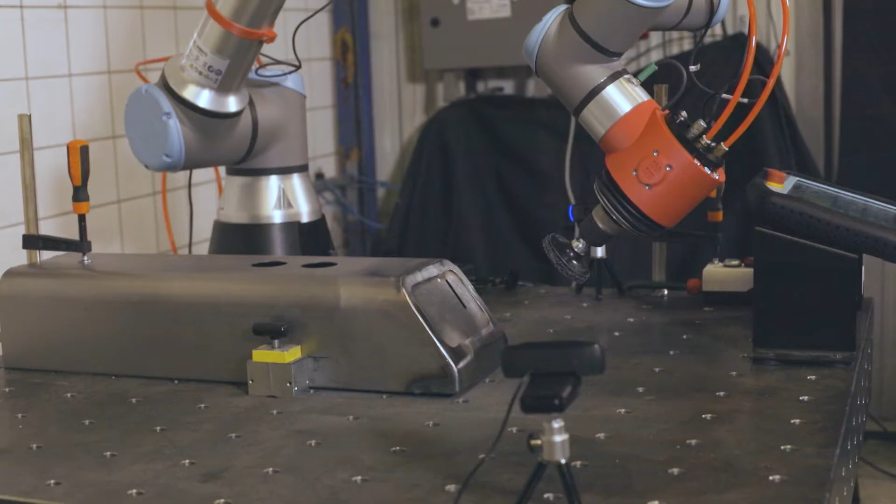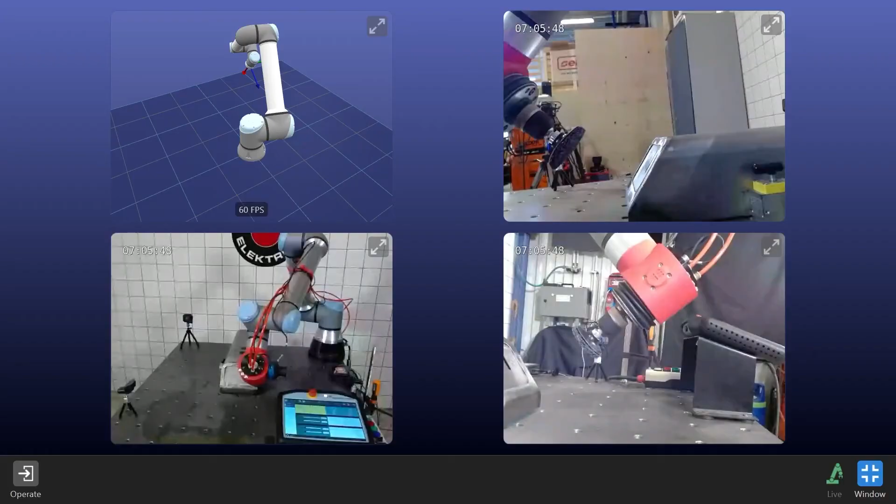So Fredrik, I've connected a robot in my workshop. I have loads of cameras set up showing everything live, but we're also recording our screens so we can get this cut together. There's nothing super interesting about the robot itself right now. There's a tool in the hand of it, but you won't be able to use it because we're using some of the pneumatics for another system. But I figured let's just show people what's possible to do with Olis Connect, because this morning I've picked up and installed the Olis Connect software and everything related to it. I'll show everyone in a second what that entails.

And I figured if you just share your screen and connect to my robot via Tailscale VPN. I'm actually using the browser plugin with OBS to record right now because it's more performant, so I was going to skip sharing if that's okay with you. Yeah, that's fine. Will you grab the video from that recording? You have an Olis Connect view pulled up as well, right, so you can see what's going on there. I can do that, let's do that.

Let's see, I mean I can share my screen, I just don't think it would be very good footage regardless. Yeah no that's fine, I got it here. I have my robot now, but I'll not go into the operator view because you'll be doing that. Correct, cool, so I'm going to head over to the robot. Okay, I'll still have you in my ear so you'll hear everything I'm saying. I'll hear everything you're saying, and I'm going to be talking to the folks and having you do stuff while the Olis Connect window is up on my screen.

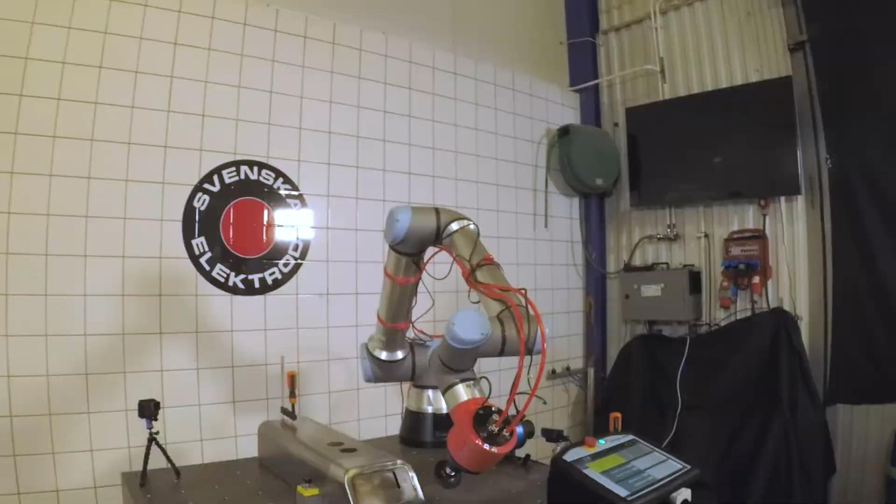So I'm bringing this GoPro with me into the workshop, so you won't see me anymore, but now I'm in the workshop. How far away is your laptop from the robot? It's about 20 meters or so.

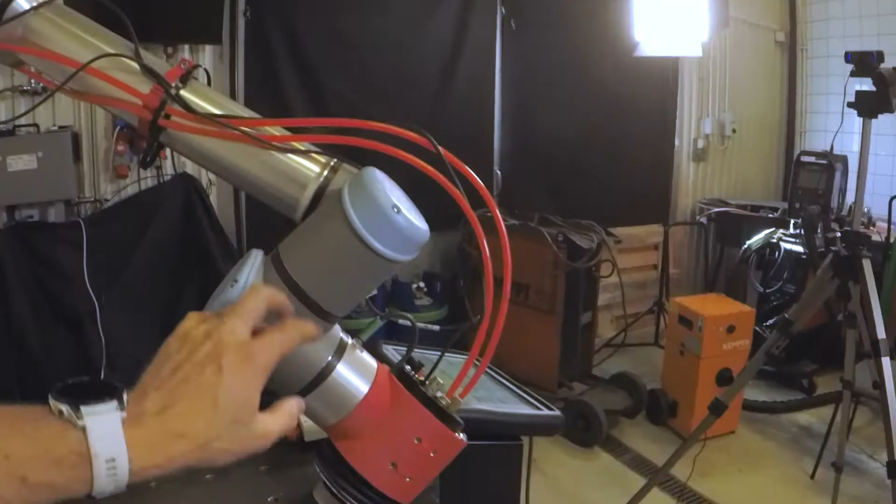So guys, what we're seeing right now is just a robot setup. We used this yesterday - if you've seen the videos, we've done some grinding applications with this setup. It's a UR10E with an MFT spindle from Schunk and a grinding tool from 3M.

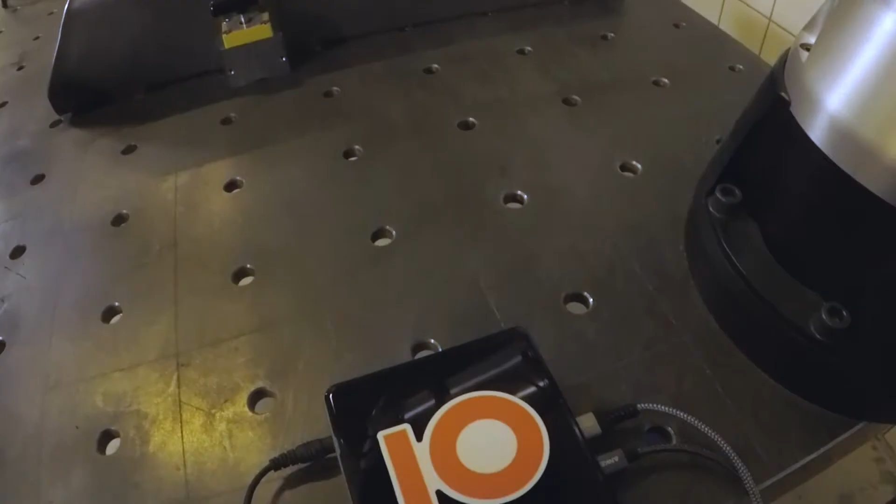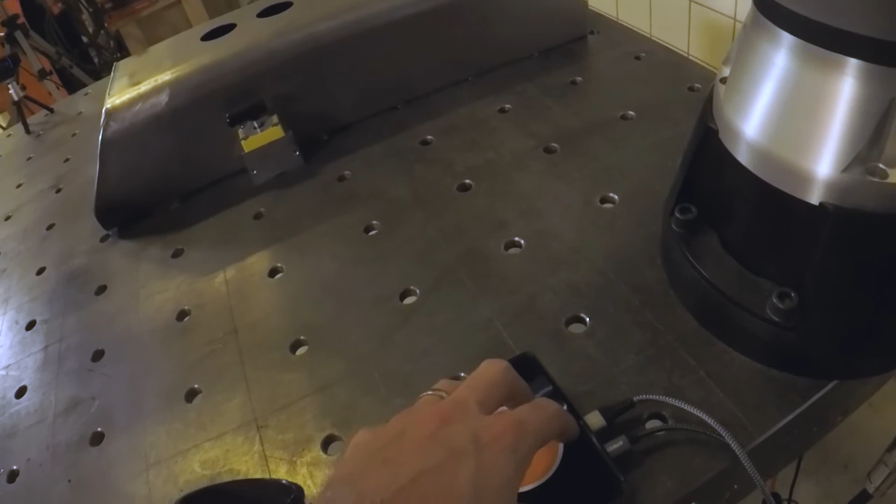And what you see in addition to what you've seen before are a couple of other cameras. You have one webcam over there, one webcam over there, and one sitting up here. And all of this is connected to this little guy - this is the IPC from Olis Robotics. Well, the PC itself isn't from Olis Robotics, but their software, Olis Connect, is now hooked up to this. And sorry for the wiring, it's a bit messy in the workshop, but this one is hooked up to the network where the robot is connected as well.

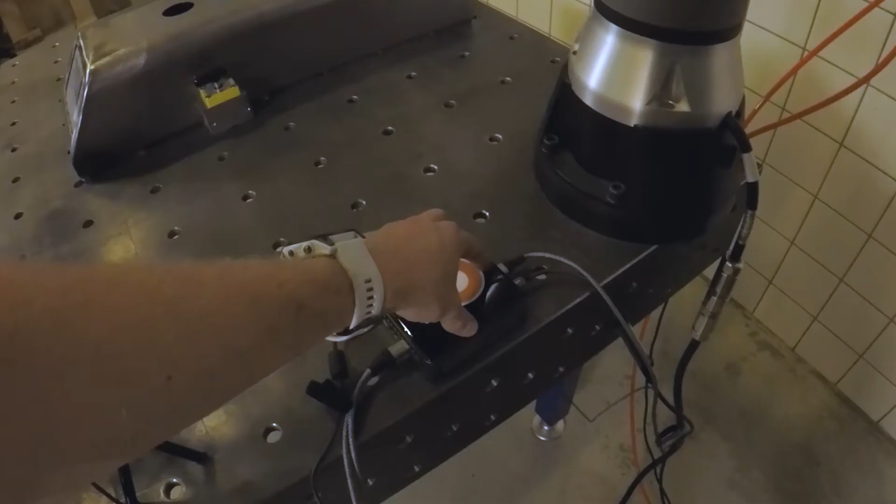So the control cabinet of the UR is connected through Ethernet to the Olis Connect, together with a lot of other stuff. Then this guy is right now connected through Wi-Fi into the internet. Fredrik, I guess you are now logged into my robot, right? Correct, so I am 5,000 miles away in Seattle, and I've got your robot pulled up here on my other screen. That's pretty cool.

Just feel free to move it. Oh sorry - so what we've done now, and what you see on the screen, is that you can see this camera, which is like an overhead view of everything. And then we have a view down here, which is right now looking at the tool.

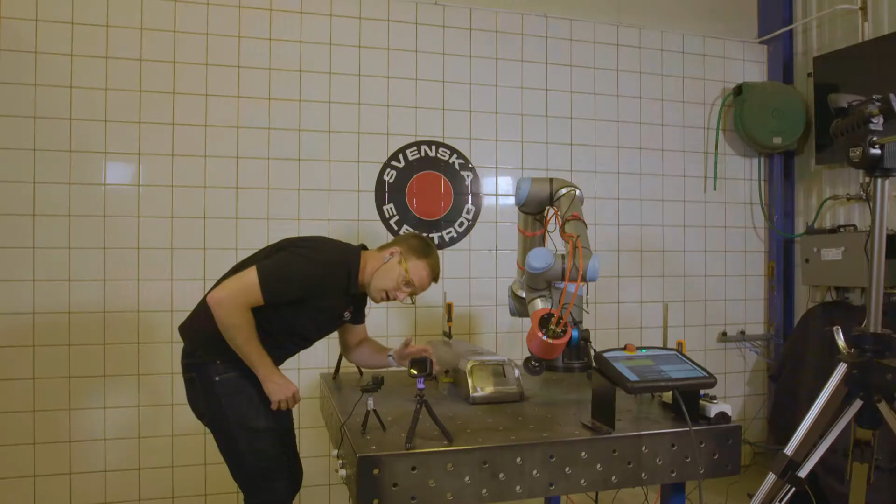We might as well put this one on the robot arm, but I haven't had time to do a bracket for that yet. So this one is now looking at this one, and then we have this one over here, looking at the view from this side. This gives us 3 different angles, which means we can remotely control the robot and have control of everything, not bumping into stuff, etc.

And that's one of the beauties of using the Olis Connect, right, Fredrik? Yeah, exactly. And I think the flexibility in mounting these cameras just kind of depends on the application, how you want to do that. If you want to use the tripod that it comes with, that's great, or you could put up 80/20 and mount them on that. It just kind of depends.

I was just kind of curious, what would you like? How would you mount this if you had a little bit more time? I know you just kind of set it up today. Yeah, so I definitely have one mounted on the actual, well, close to the TCP, but also linked to the 6th wrist of the robot.

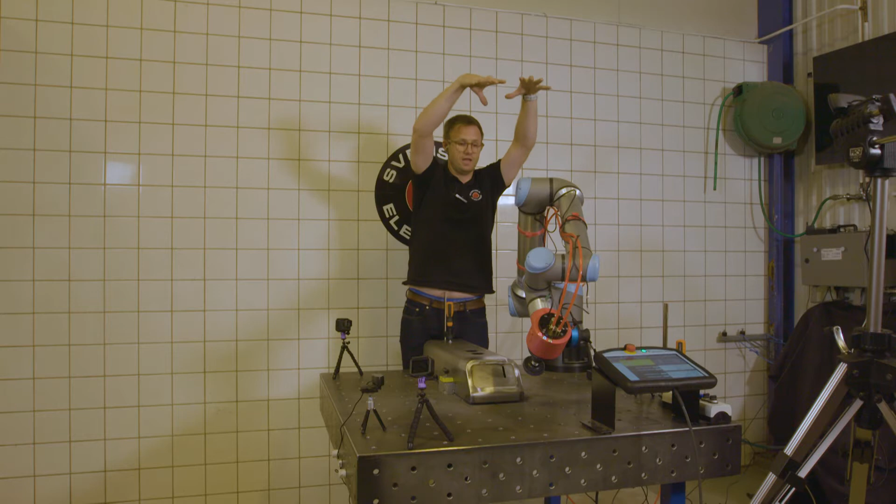So that I would have control of all my movements if I want to do nitty-gritty stuff over remote connection. The other one is definitely something like this. I might actually put one right above the whole application, somewhere up here, just to get a full overview of everything happening. And then I would have a peripheral view somewhere along the side to see something that I don't see from the angle.

So for example, in this case where I want to be really close to a surface, I would have something from a peripheral view like this and really just see exactly how I'm being close up with the part itself.

And just a quick question, how long did it actually take you to do the setup of this thing? I mean, basically depending on your setup, right? So if everything is very standard, you haven't done anything, it's basically a robot that has no UR caps, everything is just set up the way it is straight out of the box, then it simply takes like 5 minutes. Because it's plugging in, well, the longest time is actually just unwrapping your very, very professionally packed box.

So everything was very protected. It was shipped from the US, right? So we don't want anything to break in the delivery, and it's all very, very well packed. So that's actually one of the most time-consuming parts in the installation.

And just a note on that is that everything you see now, all the cables, the cameras, everything that comprises the Olis Connect, that's coming in the box, in the package. So you don't need to add any stuff. You don't need to go to your local department store and get any other cables, etc. Everything is there, so it's very professional in that way.

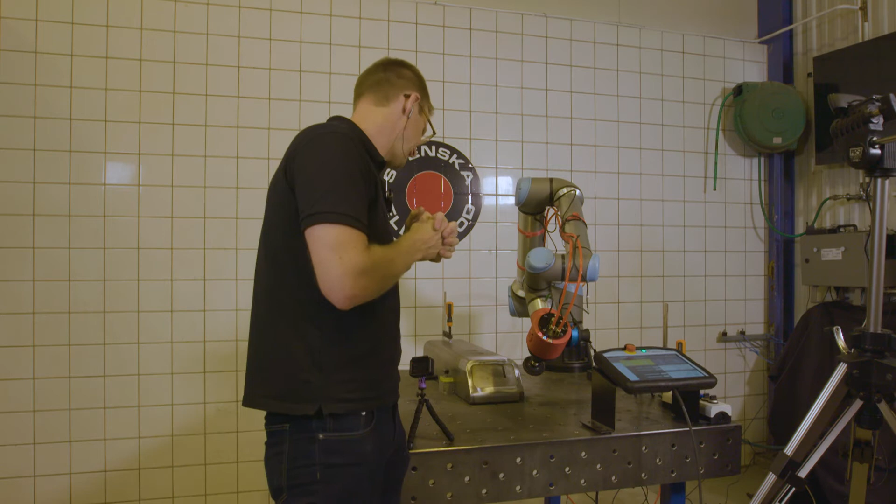So show me when you move my robot. I want to see that firsthand. I mean, my guys have been standing here when I'm doing it, but it's kind of cool to see someone else do it from 5,000 miles away.

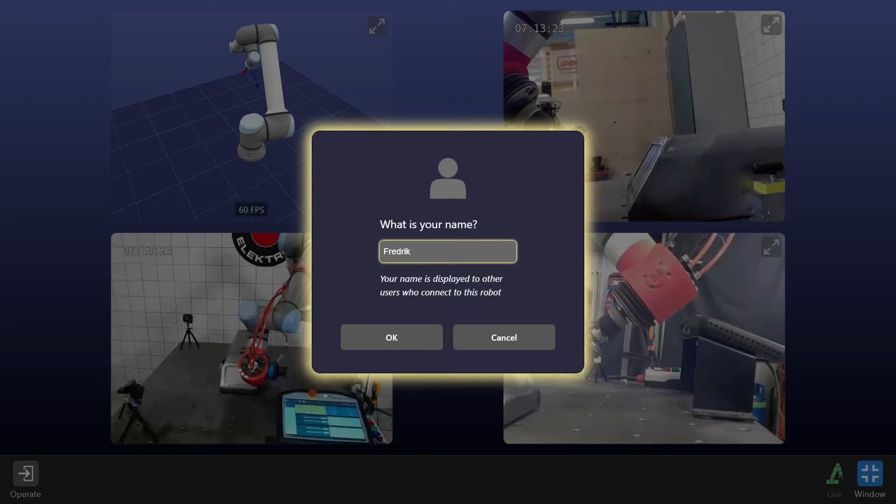Yeah, so what I'm going to do here is go in and click Operate in the Olis Connect view. It's going to ask me for my name first because it's the first time I use this robot, so I'm putting in Fredrik, and then adding from Seattle at the end, so you'll be able to see that probably on your screen. Now I open up here, I see a couple of cool digital IOs.

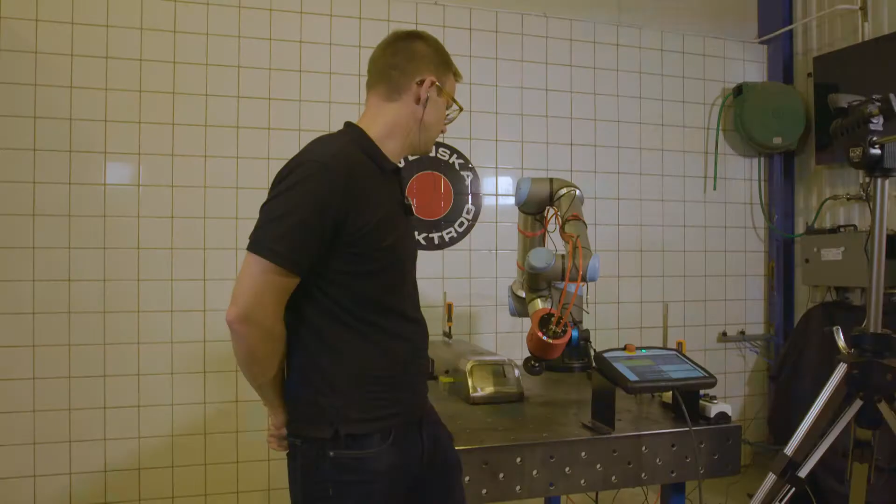I see that you're already in manual teleoperation mode, so I can just click here and drive the robot a little bit, which is pretty cool. And I notice, okay, so you have the TCP there, and it looks like the tool is basically oriented along the Z-axis. So if I move the blue button here, that corresponds to the Z-axis. We can try that, and you can see how the tool moves a little bit.

Nice. Yeah, and I can move it a little bit back there. So it's like I'm 5,000 miles away, but honestly there's not really that much in terms of perceived latency here. It seems like we have a good bandwidth here.

We have a good connection, honestly, sometimes it's just a matter of making sure you're on a good Wi-Fi network or a good wired network, and then you have this. So I can try to move a little bit. Let's see, so green there is left and right.

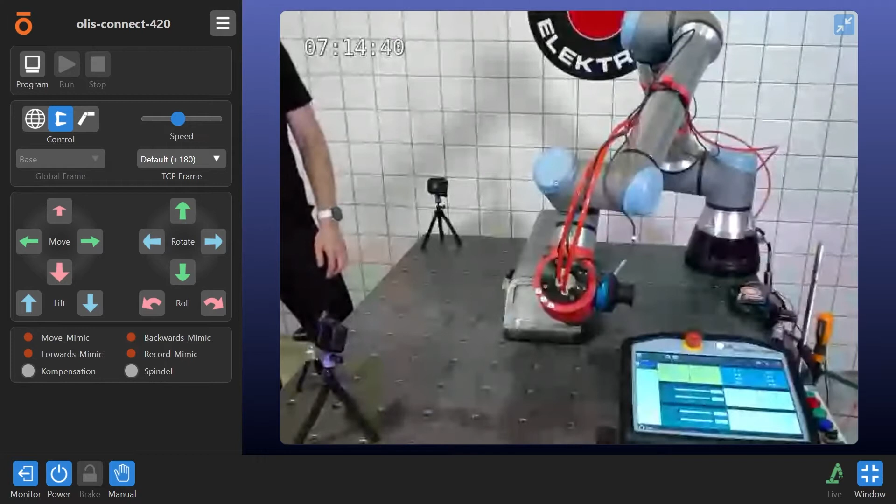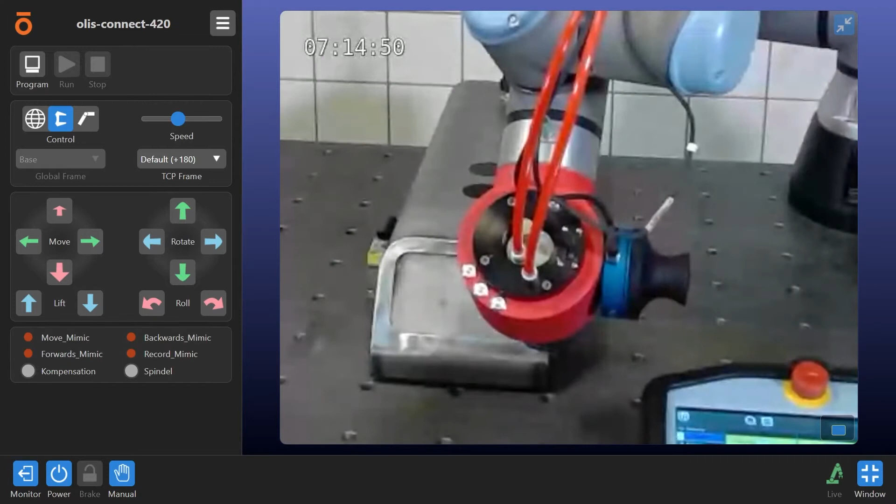Yeah, exactly, right. Oh, and that one corresponds actually to this camera. So I reversed everything, I've reversed the setup 180 degrees to make everything correspond, and that's because of the mounting of everything. So it should work, the only thing that's not going to correspond is the red arrows, that's going to be opposite.

I see, so let me try that. So there, yeah, oh okay. Yeah, so that will be up and down there relative.

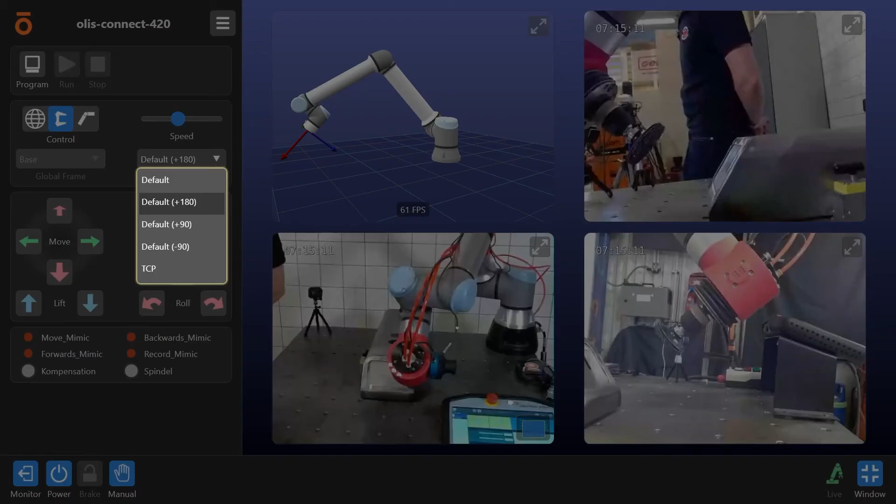Yeah, exactly. And I think you could even, if you wanted to, set up a custom TCP on the robot that was perfect, because it will automatically pull all the TCPs from the UR. So if you set up one that was sort of non-standard, even maybe at the end effector of that tool, at that 3M piece, we could actually drive with that as well.

So, okay, this is super cool. This is a really nice setup. I love this advanced set of tooling you got here.

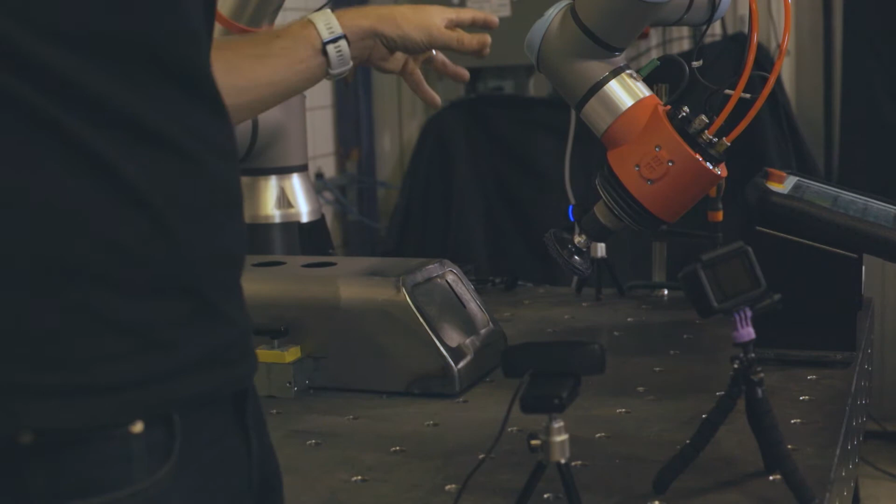Yeah, it's cool, because the reason why we think Olis Connect will complement all our integrations so well is because you have this kind of setup. You set it up with a customer and everything is fine, everyone's super happy, they're starting to use it straight out the bat, and they're just super happy.

But then it goes a weekend, they come back on Monday, and it doesn't work. And it's, why is it banging into everything? Why is this not working? Why is this not working?

Well, if the customer is not 5,000 miles away, but literally across the other side of Sweden, which would take me 5 hours to drive, I could just log into their robot, see what's happening, and tell them and guide them through it. I wouldn't necessarily need to go into the Pendant to help them do stuff, but I could actually just be online like we are now and help them do stuff remotely, because I'm seeing what the robot is doing, I'm seeing what they're doing, and then just guiding them, holding their hand, so to speak.

So that's one of the benefits that I really see with Olis Connect, no matter the application, whether it's a pick and place application, a grinding application, a welding application, or whatever.

Do you think this is going to save you time with your existing customers, or is it going to enable you to actually go farther and support customers that are farther away from where you guys are? So, both. I mean, Sweden is a long country, right?

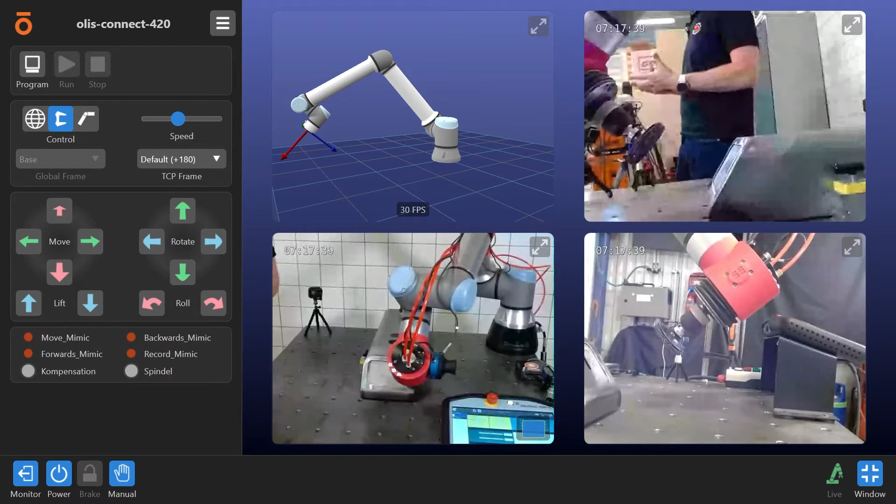So it's about 2,500 kilometers if you drive across the whole country. So to be able to support customers up in Luleå on a daily or weekly basis, this will enable us to do that, giving them good on-ground support up there without any staff on premises, which wouldn't be possible otherwise. But with this kind of setup, that would definitely work.

But then, we have existing installations where we have daily calls because the customer itself doesn't feel that comfortable, or they're changing staff a lot, which means that having something like this on site, when they call and we can talk about what's actually happening as it is happening, that would be just super beneficial.

Oh, it sounds super cool. So I'm going to move over to my computer again, and I'm going to see what you're doing when you go into, I'm thinking, show me the Pendant View in the streaming of the Pendant. Cool.

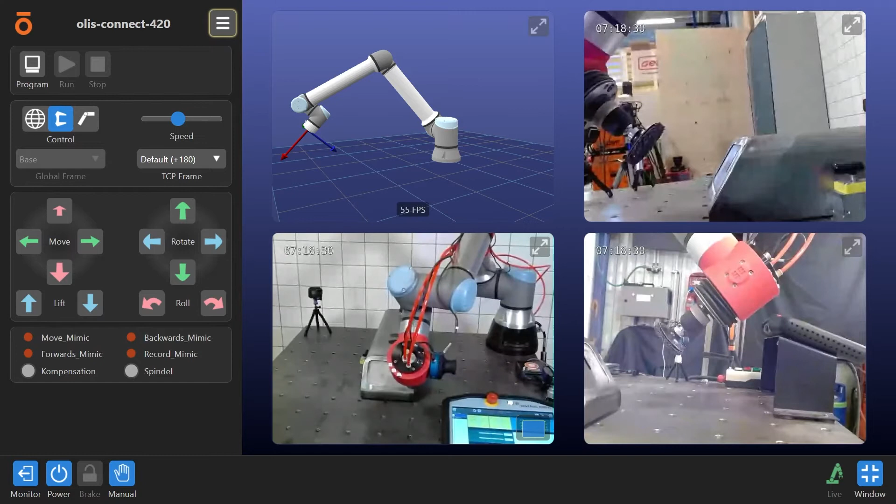So what I do then is I pull up the Pendant View here. I click on that hamburger menu and then Pendant, and then it says failed to connect. Do you have a password on the, the standard password? Yeah, the standard password, exactly. So let me put the standard password in and go back, and you can cut that.

That's fine, I like these kinds of things. It's supposed to be organic.

So can I see what you're doing now when you go into the pendant? I can just share a window here so you can see a little bit what's going on. Okay, I'll move into the Google Meets tab then.

Okay, so this is cool because this is my pendant now. We can see up on the right-hand screen of that pendant that it's in remote mode, and that's what enabled you to actually do the remote controlling.

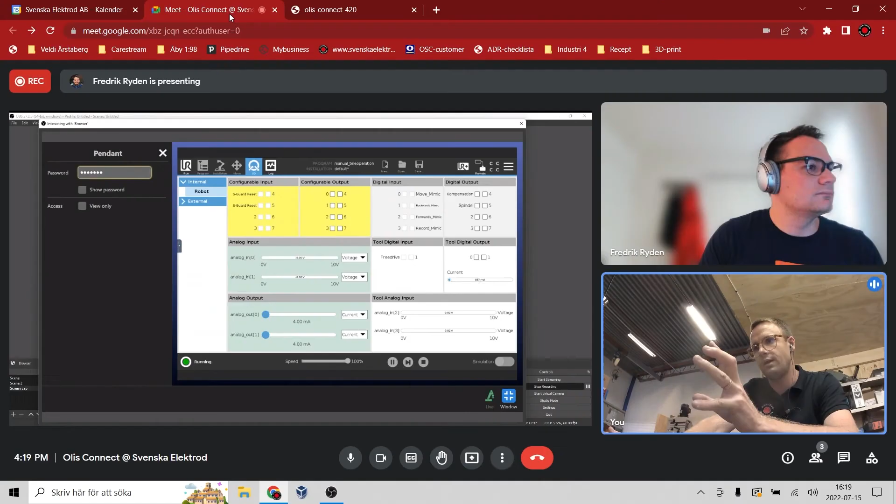Right, but right now are you in view-only mode in the pendant, or can you actually do stuff? Oh, I have full control here. We put the password in and changed it to full control. So we actually have full control on the pendant.

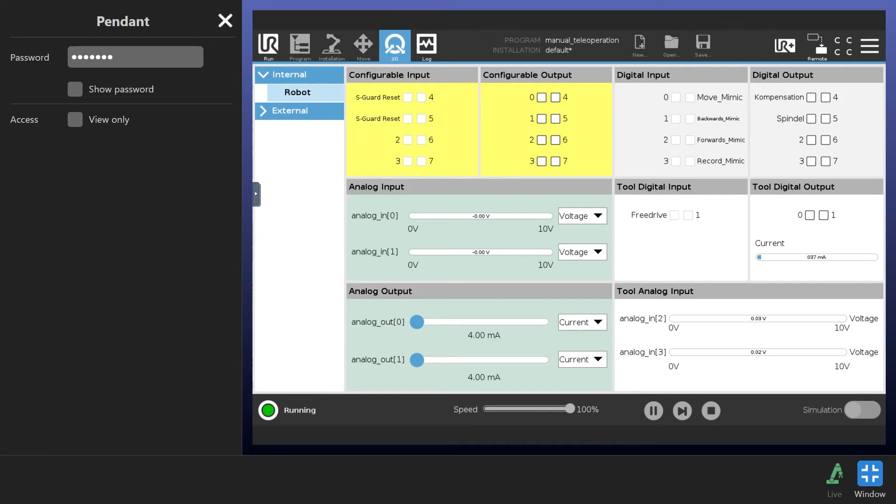Now this robot is actually in remote mode, so I can't actually do anything at this point. What you can do, if you deem it a safe thing to do, is take it out of remote mode. This is why we put an extra safety barrier on it, because you might not want people to be able to go into the pendant at all, even to take it out of remote mode. So that's why we have the password.

But let's say I do that. I can switch over to local control because I have your explicit permission, and yes, you do. Well, I wouldn't go that far, but you do have my permission. It's not that I know what I'm doing, it's just I want to see it happen.

Right, let's work through it. So you can see now there's an error at the bottom saying the UR is not in remote mode. So Olis Connect is very aware of this, and basically at this point it won't let you restart any programs. It won't let you manually control or anything, so none of the stuff that would require remote mode.

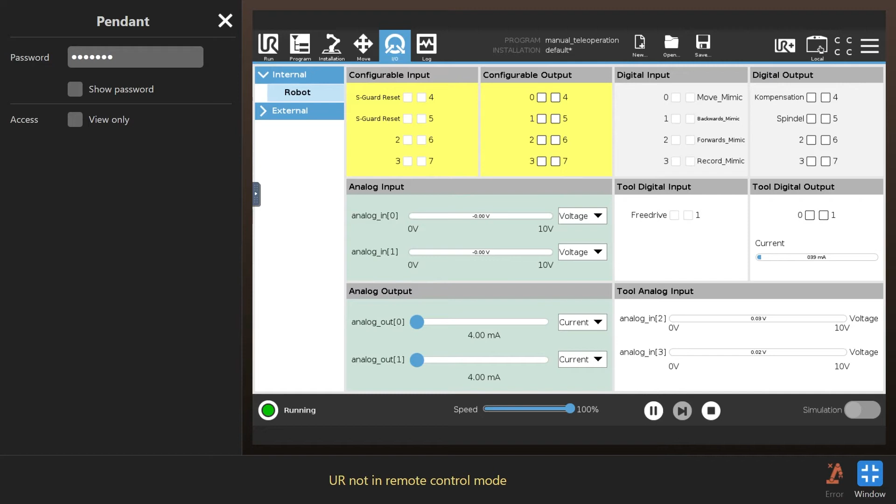Exactly, you can now help someone do the programming, but you cannot actually start anything without going into remote mode again. Correct. Yeah, so first, one thing we can do is get to see your UR caps.

We can see the Olis Teleop UR cap here, which is useful to see all the different settings and network settings, and you can see that now it's controlled by me, it's actually listed here, so that's kind of nice as well. You can go through and see all the different setups, or we can see what program is loaded. Right now it was just the main manual Teleop program that was being loaded.

And this is loaded, you don't need to create this, right? As soon as I put it in remote operation and you log in, that's already created, right? Yeah, correct, so it gets created automatically. You set up your Olis Connect and it gives you access to all the programs, but it also puts this manual teleoperation program on there automatically, so you don't have to do anything.

Now if you want some custom teleoperation program, we actually have support to do that. So let's say, hey, I want every time a person goes into manual teleoperation, I want this light to be flashing - you could actually do that. You could change this and say, I'm going to set some IOs here to trigger that light and do all that stuff. And you can save that down and call it 'custom, my custom teleoperation program,' and then that can actually be used.

So that's another really cool feature we built in, because depending on what environment you're in, you might or might not want to customize that.

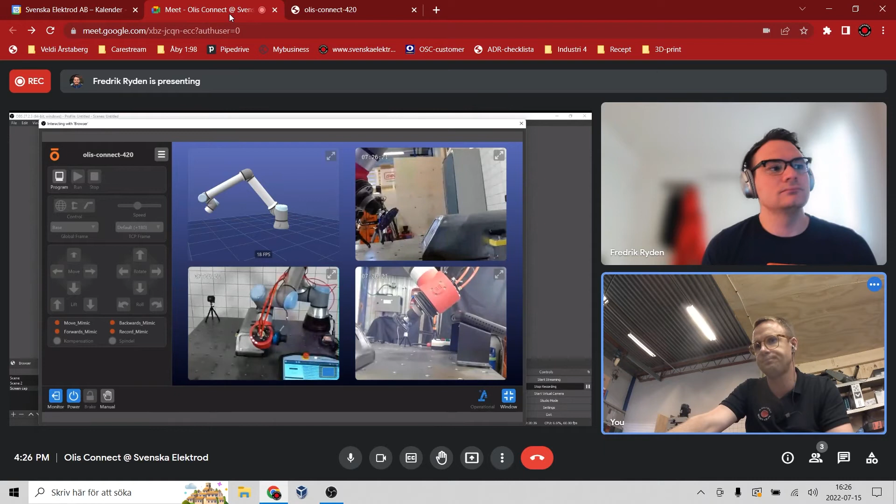Yeah, and one thing I actually wanted to show you was the alerts, which is kind of cool. I don't know if you've had any alerts. Yeah, you triggered a protective stop. So I can actually see these past alerts on the device as well. When you're remoting into a customer's site and they're saying, hey Karl, we've been having problems all night long, the robot stopped 8 times, what is going on? You can just go in and check those instances and see what actually happened. You can say, oh, I think we need to swap out that tool, or whatever it might be.

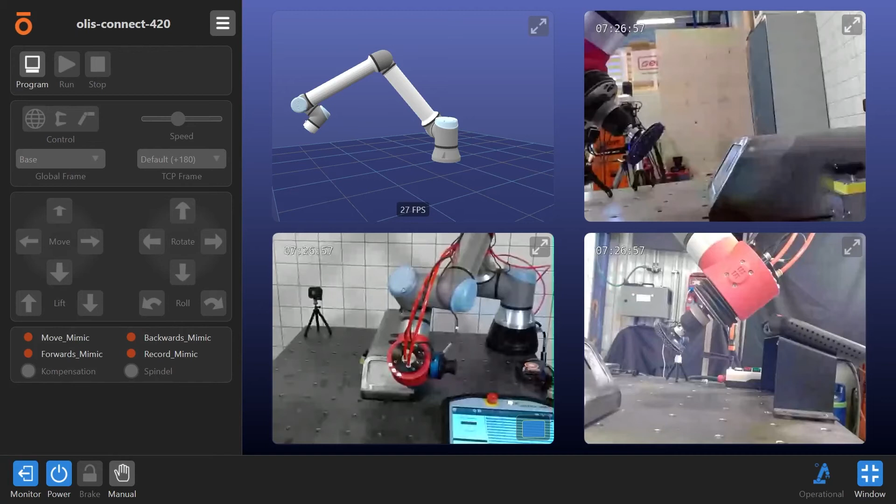And we can actually try to trigger an alert right now. So you have your email put in there, we can keep the emails going to you. Literally, if I just jog the robot and you hold your hand up, we can e-stop it, and that would send out an alert. You want to try that? Yeah, let's try that.

I'll put my hand next to it like so. Okay, I'll move it in that direction, I'll slow it down a little bit. It's fine. There we go.

There we go. Yeah, so now I got a protective stop notice on my screen, so I can see that this happened. And the same protective stop is happening over here, so I need to enable the robot here if I want to do anything. But that's one of the beauties here, I don't actually need to do that, we can do that from over here.

And the cool thing about this is that now once that's been triggered, it should send an email to me, right? Yeah, exactly. It takes about a minute or two for it to compress all the video, since it takes the last 30 seconds of video and emails that out. But it should arrive in the email shortly. In the meantime, I can go in and see what's going on here.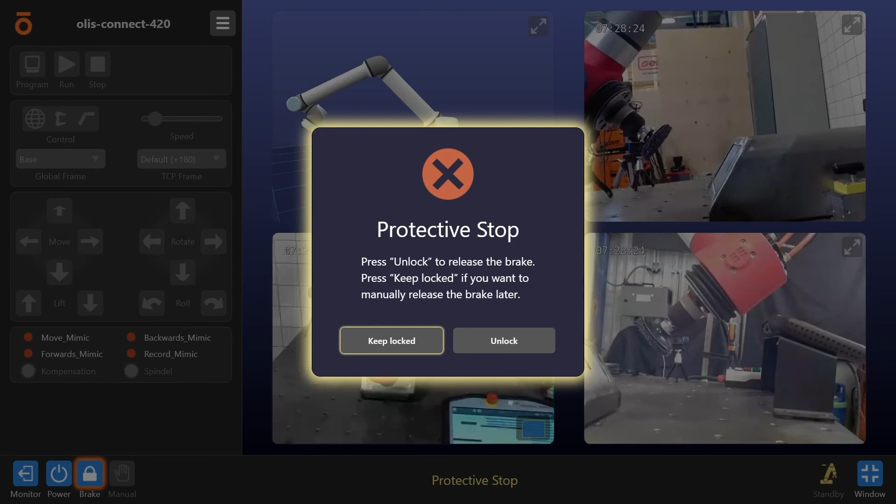So I can actually keep the robot locked if I'm not ready to unlock it, if this is an unfamiliar situation. I can look at all the cameras and say, okay, I know that no one is in this cell. And I can look at the camera and say, you know what, it looks fine to unlock it. So I can release the brakes.

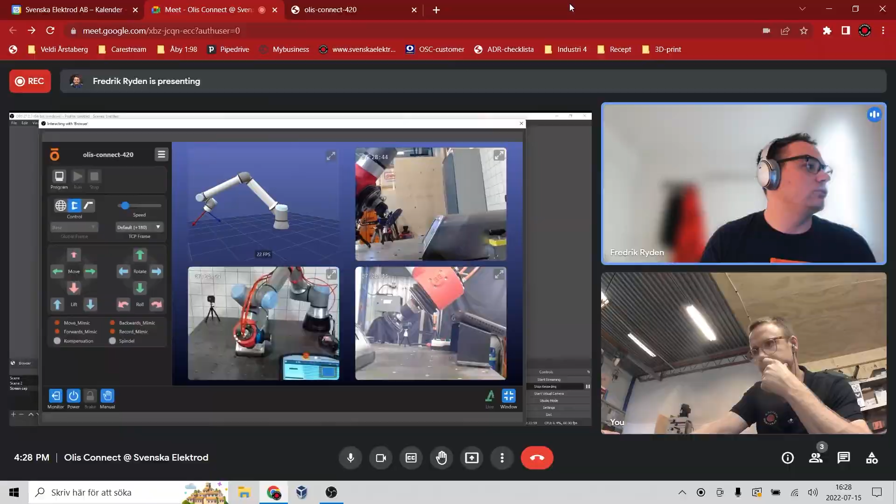And if I wanted to, I can actually go back into manual remote control mode, and now I can drive the robot again.

So you should check your email, and maybe you should share your screen on that too. It's already recorded my whole screen, so I'm just moving into the email account.

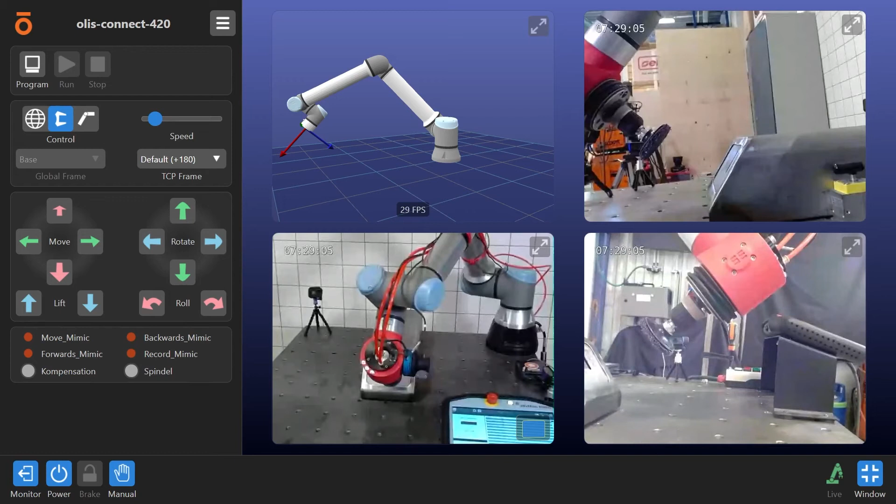No, not yet. It's probably going to take a bit. I saw earlier today it was maybe 5 minutes from when I triggered it that the email actually ended up in my inbox. It depends, you might have some antivirus scanning on your email servers that could crunch through it.

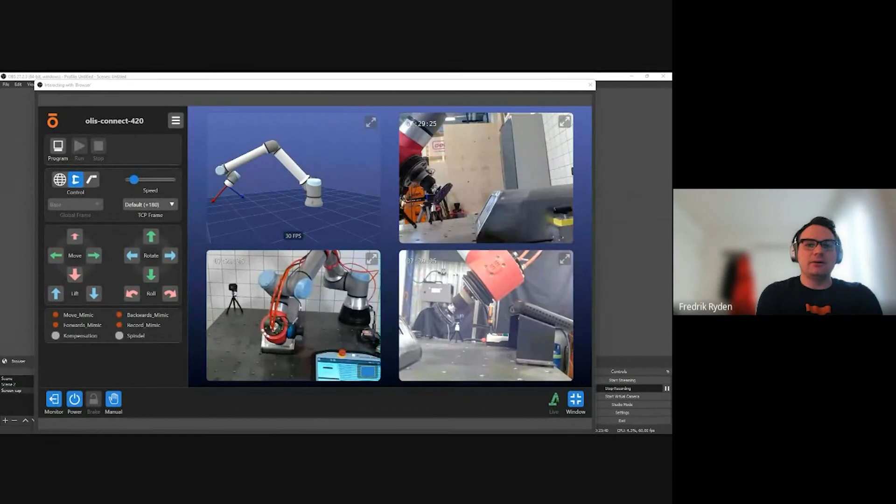Exactly. But in the meantime, it's almost fermented herring season. Are you fermenting right now, or what's the plan? No, I'm not. I'm not a fermented herring person.

So I really enjoy food, trying out different foods. Whenever I'm abroad, that's one of the things, going into the local shops and really going through the local cuisine. But the fermented herring, I haven't been in such a context.

I'd say it's a flip of a coin. Either you are a fermented herring person, where you're in that context and everyone around you is having fermented herring parties, etc., or you're on the other side - not that you don't like it, because no one likes the smell, but you're just not in that context where you eat it. It's really a family specific matter whether you're into fermented herring or not.

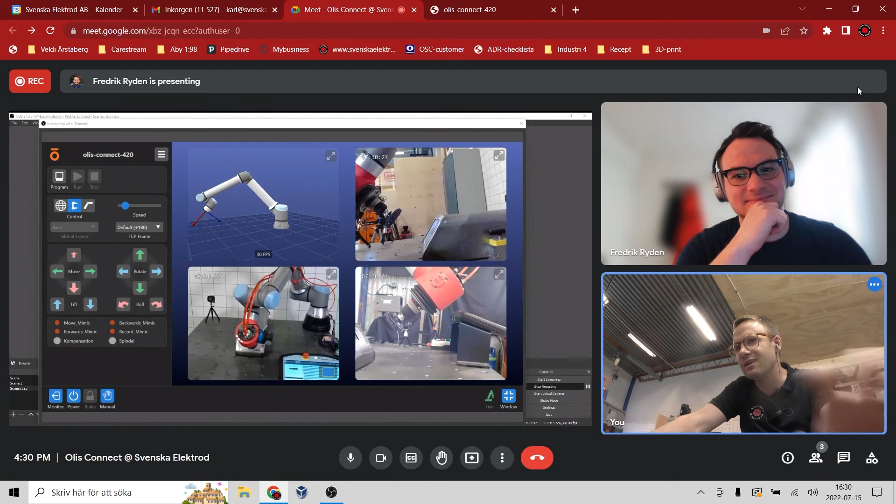So I actually received the email now. Nice, Olis Connect 420, that's the name of the setup here. Robot notification, protective stop triggered. Let's see, oh yeah, so here I have some more or less GIFs showing the actual event.

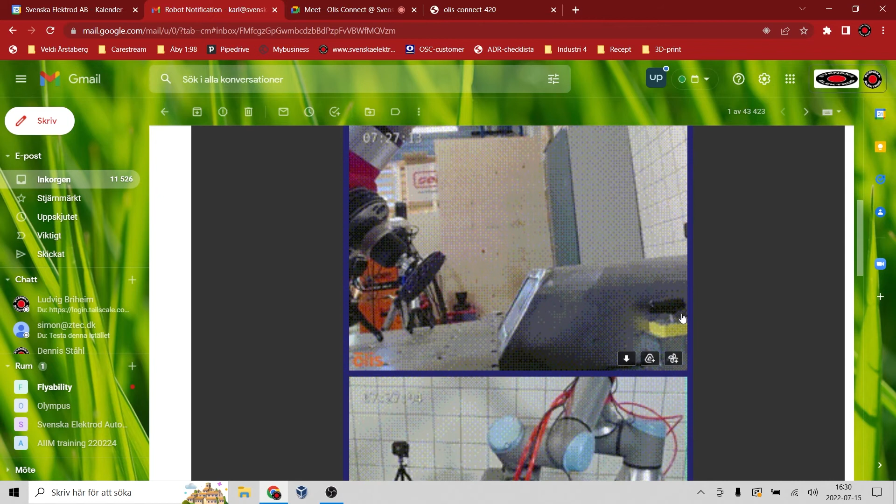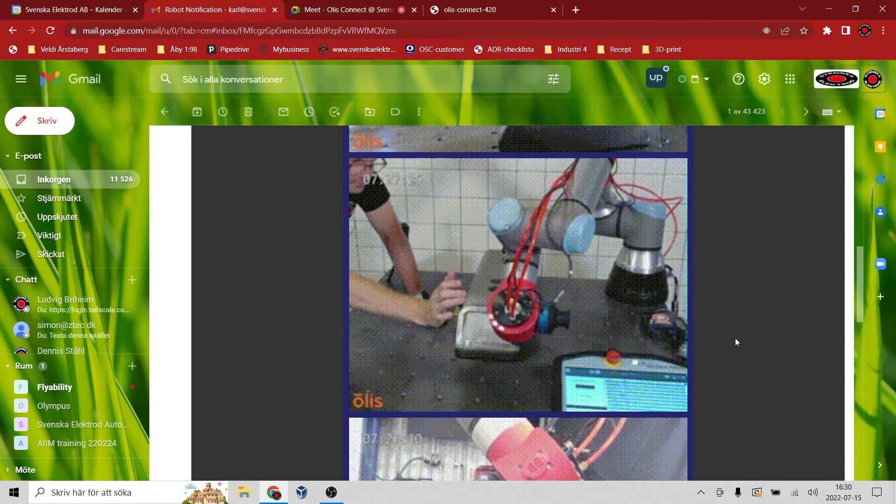The past 30 seconds, you said, right? Yep, yeah, there I am triggering it, you're moving it, boom. And these - I have the log file as well, so I can see what's happening in the log, and down here I have the full video content that I can download. Okay, so that's why it took a couple of minutes, but that's really convenient.

What would it mean? Like, what's the difference from just getting a phone call from a customer saying, 'Hey Karl, we're having a problem,' versus them just forwarding you this and saying, 'Hey Karl, what's going on?'

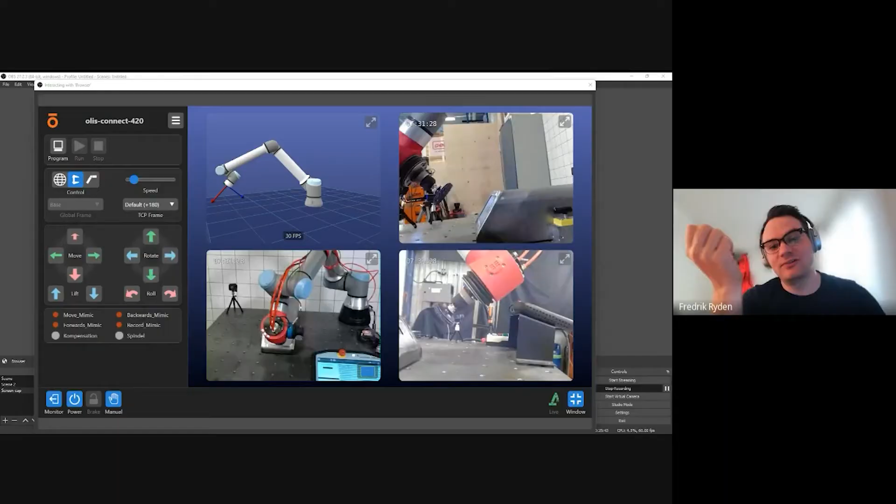Yeah, no, of course. This is so powerful whenever you're discussing with customers - sorry to say it, but 90% of the time it's just operator error behind the wheel, that's the reason for the issue. But those 10% are the most important ones. If you can really show them that you understand the issue and solve the issue, then you've got the customer on your side. The one that never figures it out and always triggers the protective stops never learns. If you can help them remotely, they'll definitely be in your corner.

So this is, of course, a very good tool, because some customers call and say, well, this is happening, and you say, well, that's not possible because we've set up this point and this point - it won't go there, there's no such movement. Yes, but it's doing that. Okay, but if we have this video showing exactly what it's doing, it's just perfect.

So yeah, I think that's a powerful tool, because obviously when you deliver the system, you do some basic training, right? But it's hard to remember, and that knowledge probably declines over time, and then maybe new parts come in and things change. So I feel like it's a way for you to touch base a little bit and say, hey, maybe we should refresh some of that training.

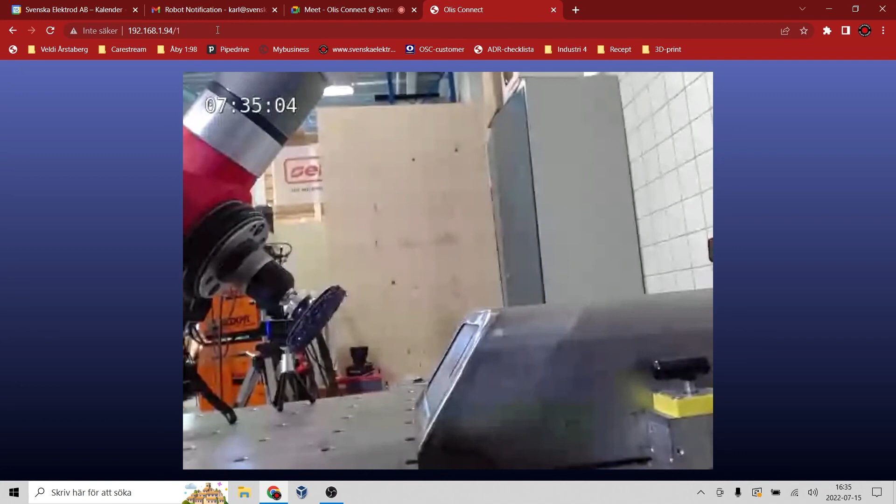There's a cool feature I wanted to show you. If you're on the Olis Connect view, just add /1 after the URL. That should bring up just the first camera, which means you can actually set up a little control room if you have multiple screens.

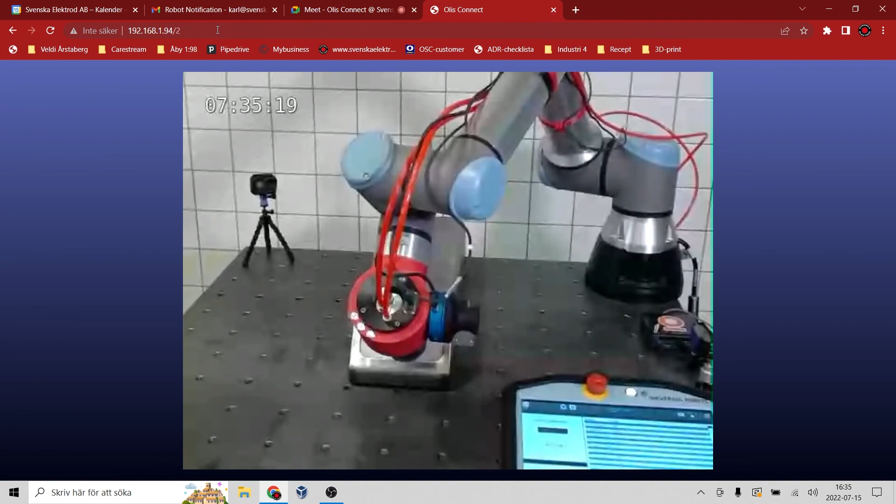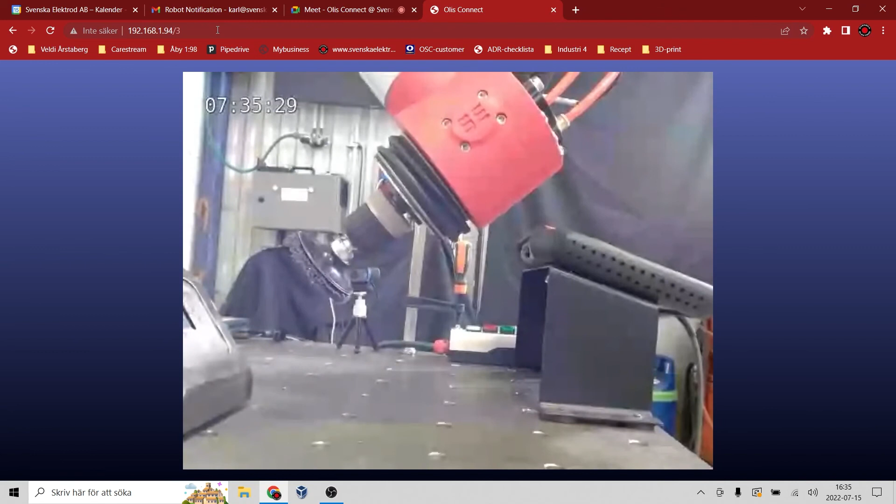If you want one part of the facility to always show this one camera, you can pull it up at some central location so people can see it - maybe from the break room or wherever. You can just say let's keep feed number 1 running there. It's very flexible how you can build this. I prefer to use it on my phone and laptop, but if you want to build an actual control room, you can.

That's cool, that's really nice. Yeah, I tried circling through all 3 cameras while we were talking. Really, really cool stuff.

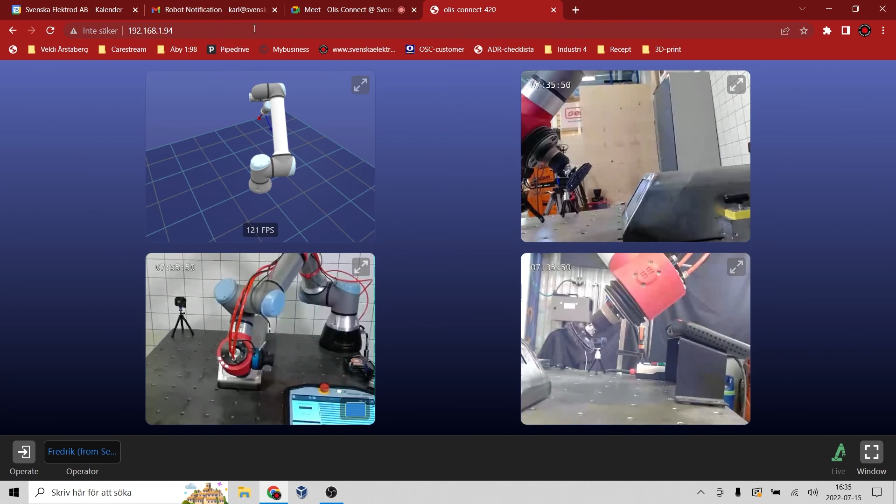I used this today - it wasn't my intention, but I had a customer discussion this afternoon with a customer from the UK doing scrap recycling. We were talking about using a specific tool for element analysis with the robot. They would load up scrap bins, and we'd use 3D vision software to detect parts, pull those onto a workbench, do a test, and sort into a specific bin. As you'd imagine, 3D vision, scrap bin, scrap yard, vacuum - there are multiple things that could go wrong here. In their case, they have one shift, but this robot will be going around the clock.

So I showed them what I could do from my office on the robot, completely remotely, and they were like, oh my God, this is fantastic - because now they can truly keep their worker robot up and running all the time, even when it runs into all sorts of strange remote problems.

Have you tried it on the phone yet? I have, super cool. I'm definitely going to do some more after the vacation - or maybe I'll do it from vacation and control the robot from the phone and record that as well.